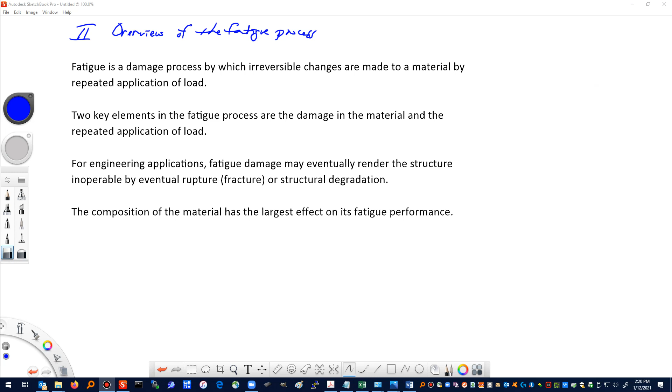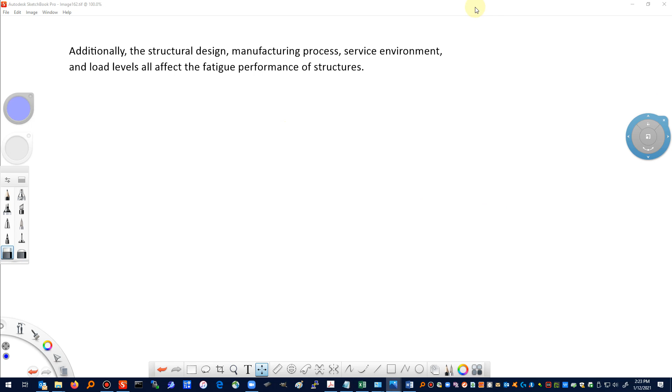Now, of course, the material composition isn't the only thing that affects the fatigue life. How that structure is designed, whether or not it has stress concentrations in it, for example, the manufacturing process, stamping or machining, that sort of thing, the service environment, and the load levels, of course, all affect the fatigue performance of the structures. So we're going to take a look at a lot of these different aspects, and we'll learn how to incorporate this into the kind of fatigue data that we might get in a laboratory environment.

All right, so what goes on in this fatigue process? Let's spend a few minutes to talk about the fatigue damage process and some of our familiar assumptions that we might have in engineering and engineering design. So probably one of the most common engineering analysis simplifications that we can make is that materials and systems act in a linear manner. So in other words, Hooke's law. Of course, Hooke's law, we would write this as F = Kx.

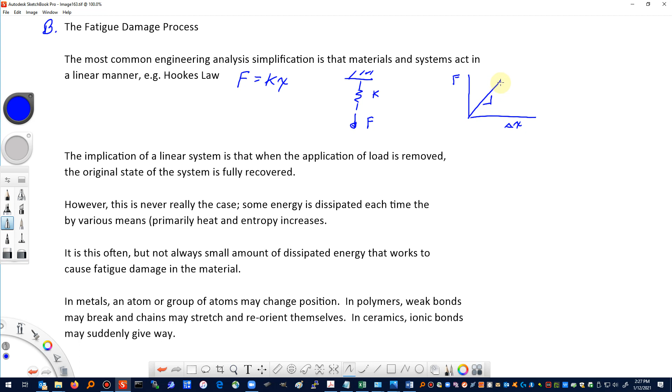And that comes about through a spring being loaded and observing what happens to that spring. If we put a load on this and we have certain spring stiffness, then the load and the deflection of that spring, if it's a linear spring, are linearly related. As we increase the force, we have an increase in deformation. As we remove the force, we have a decrease in deformation until we get back to its equilibrium position.

In other words, when we have this linear system, when the application of load is removed, the original state of the system is fully recovered. That's the assumption with linear elastic behavior. I know many of you have done linear elastic finite element analyses. You're assuming that this thing, whatever object structure you're looking at, behaves like a giant spring.

When you get down to it though, if you have a real material that you load and you unload multiple times, the original state of the system isn't really always fully recovered. Some energy is going to be dissipated each time, usually by heat, and the entropy will increase.

Usually this amount of heat that's generated is pretty small, but it doesn't have to be, and this heat can work in different ways. This dissipated energy is from things that change in the material that don't go back to their original positions. In metals in particular, you might have an atom that moves into a vacancy, or a group of atoms may slide like a slip system or a slip plane.

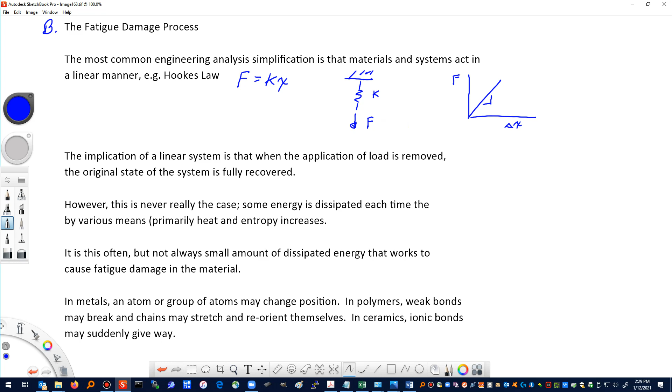So these things that go on, the slip systems and whatnot, these small changes can accumulate to cause internal redistributions of stress and strain in the material. And then small cracks can form that lead to eventual structural failure. So there are a lot of different points of view we can take to study fatigue. We can look at microstructure, be very focused on that aspect. We can take a look at very small defects like small cracks and so forth. We take the point of view of structural design or manufacturing and so forth.

And while all of these are good points of view to study fatigue from, for our class, which is a class in fatigue analysis, we're going to study the engineering methods for computing the useful life of engineering structures. All of these things are important. The microstructure and the material properties are very important, and we will need some way to quantify the material properties and be able to use them effectively.

But in our class, we're not going to be very concerned about the specifics of the slip planes and dislocation development and so forth. We're going to leave that to the metallurgists, and from their perspective of teaching the class, they will have that aspect. Someone that is going to make a career in fatigue and durability analysis should have all aspects of fatigue learned and covered. For our class, again, we're going to look at the analysis of structures to calculate fatigue life.

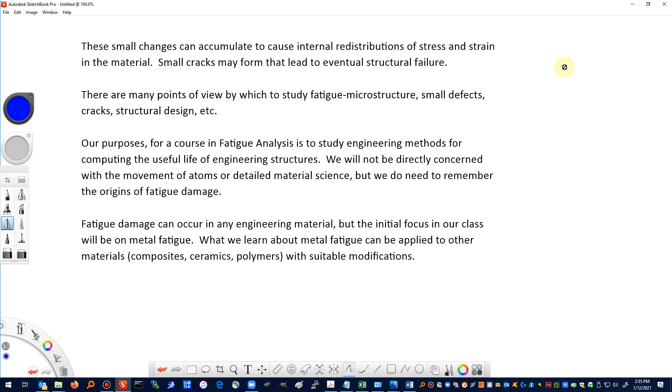So there's many places that we can start when we talk about fatigue analysis, but I think personally a good place to start is taking a look at time histories of load. We said that we had to have a repeated application or alternating load applied to our component in order to have this fatigue process. So let's classify or explain some different things when we take a look at time histories of load. And our initial discussion is going to be motivated by how things have historically been looked at for fatigue analysis. Certainly fatigue has been around for a long time, but the systematic analysis of fatigue was really started by a man named August Wöhler, who studied failure of train axles.

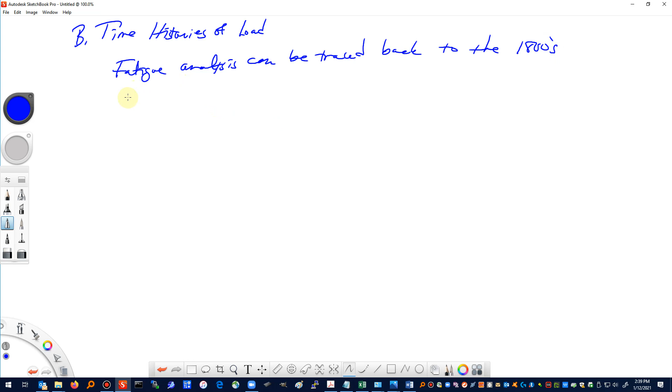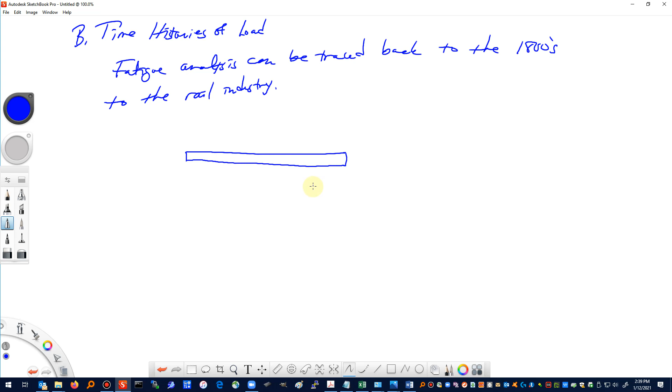All right, so in the 1800s, transportation of materials and goods by rail was becoming very common. And if you're familiar with the way train axles are, I'm going to draw kind of a poor sketch, but it'll work for our purposes. We can think of a train axle, which is really a big circular steel bar. We have a couple of wheels attached to it. Okay, and this of course would be the thing that sits on the track.

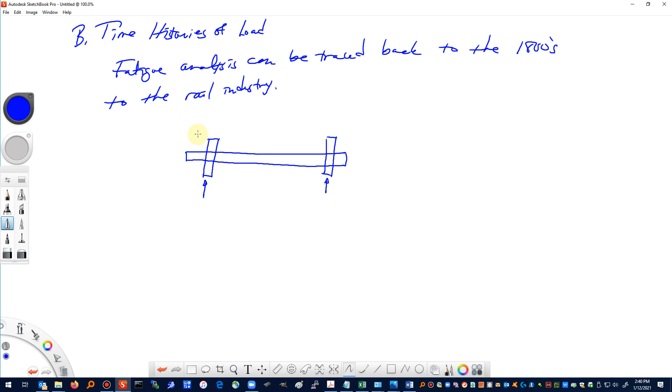The reaction from the track is up this way. And then train axles usually are used in sets, and they're attached to each other by the side frame, which transmits the load from the car to the axle. Now the side frames actually sit on the outside of the wheel, at least in modern trains that I'm familiar with. So that presents a downward load this way. And maybe I can use a different color. If we track what happens to a point on the outside surface of this round bar, okay, so we have a circular cross section.

If this were a problem in static loading, we would be familiar with our formula that sigma is equal to My over I. We would plot the shear force and bending moment diagram for this beam-like structure. The shear force diagram would go down, it would go over and up, it would have zero shear in between, it would go up, over, and down. So this would be what the shear diagram would look like.

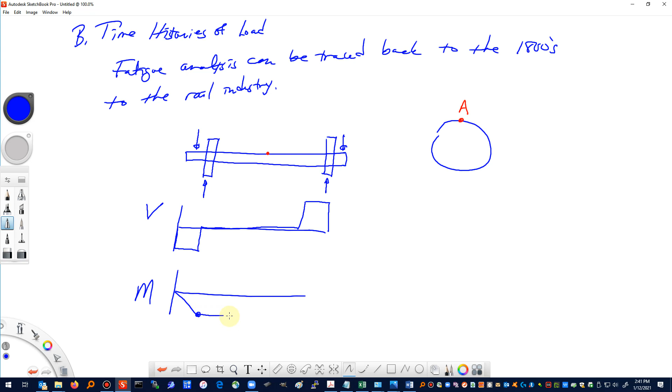The moment diagram for this structure would do something like this. It would slope down, it would hold constant in this zero shear region where it's not changing, and then it would slope back up. So these would be the key points here. And in between the wheels, then, we have a constant bending moment.

So if we think of this as an elastic loading situation, we've identified the centroid of that. The distance from our centroid to where that point A is at, we call that distance y. Y, not y bar. And that point on top would be in compression, so we would say that the stress at that point would be equal to minus M times y over I, I being the moment of inertia of the section.

If the load is constant and the cross-section stays constant, the stress changes with this position y. Let's take a look at that in a little bit more detail. Okay, so I've drawn a sketch with a little nicer circle there. As the shaft rotates through some angle theta, the height y will change. Of course, when theta is down here at 0 degrees, then y is equal to 0. When theta is up at the top at 90 degrees, then y is equal to the radius of the bar. But in general, we would say that the height y would be equal to r sine theta.

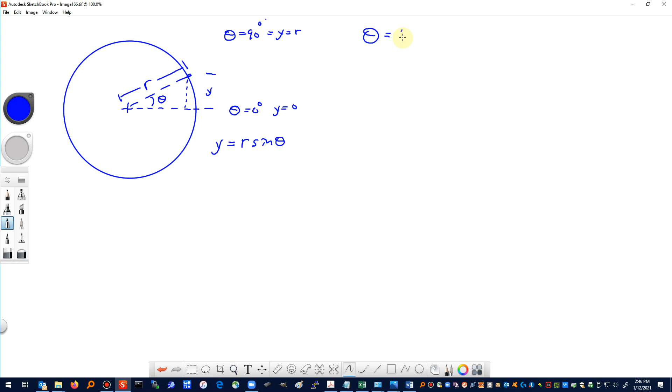Okay, so there's a little bit more room there. Now, if the shaft is rotating at a constant angular velocity, then our stress would be proportional to, of course, M over I times this height, the y distance. We would say that, given all the other things being constant, the stress would be proportional to sine omega t. And as it goes up to the top, we would get one value of stress, say negative, and as it goes down to the bottom, we would get another value of stress, say positive, depending on how the bending loads were acting.

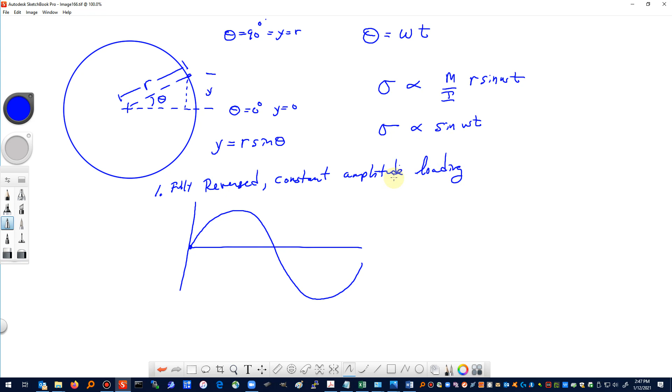And so if we were to plot this out, starting with theta equal to 0, we would have a sine function. And this particular type of time history is called a fully reversed constant amplitude load. We'd have one cycle of load that goes from here to here. We would have a maximum stress and a minimum stress that would be defined in these ways.

So as we do fatigue testing today, even though we don't often use rotating bending, at least in my lab, I often still use fully reversed constant amplitude sine wave type loading that's digitally controlled by the controller on the testing machine. Now, in addition to that, we could have constant amplitude loading that's not fully reversed. And so in those situations, we would have some cycle that was offset from the zero load. Okay, so this would be stress on this axis and time on this axis. And so we could have a waveform that was up here.

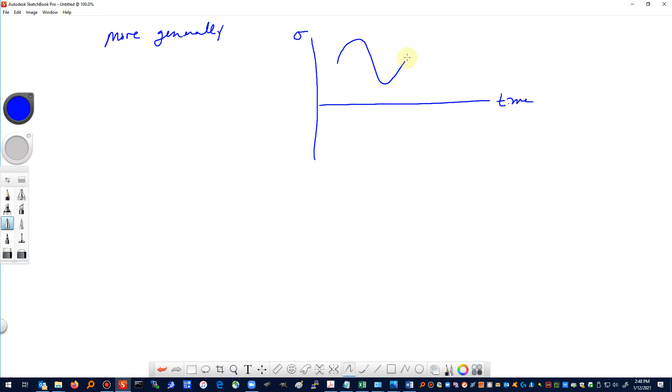Now there are some important terms that we're going to be using a lot in the class. We've already talked about a cycle. It's a complete up and down of this. So from here to here would be one cycle, from this point back to this point again would be a second cycle. We can talk about the amplitude of the cycle.

And we can talk about the stress range of the cycle. The stress range would be from the peak to the trough. Okay, and that would depend on the maximum and minimum stress. So again, we could have the maximum of the cycle and the minimum of the cycle. And the stress range, delta sigma, would be the difference between those two. We can also see that the stress amplitude would be half of the range. And then this place where these stresses cycle about is called the mean stress.

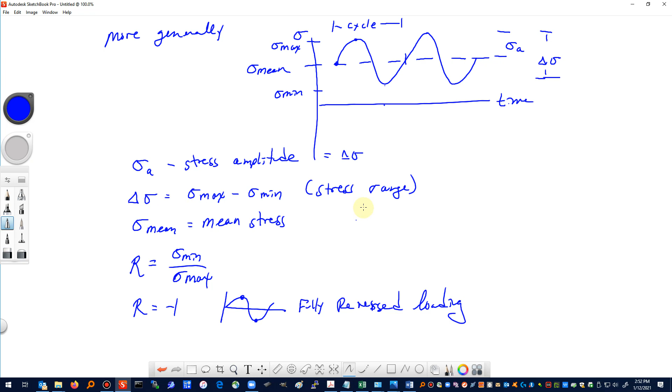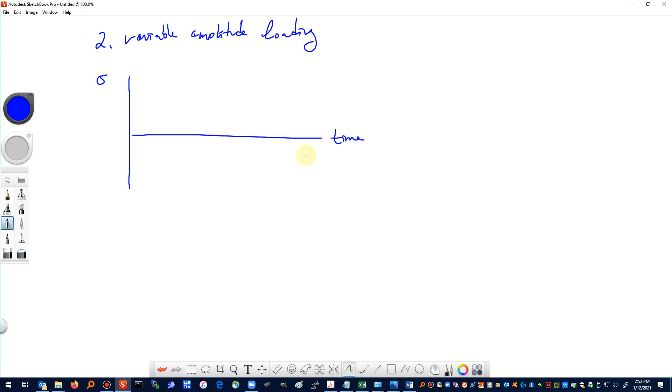Now there's another type of loading that I'm going to show you and that you're going to work with in our class, and that's going to be called variable amplitude loading. So again, if we have stress on this vertical axis and time along this axis, variable amplitude loading just kind of goes all over the place.

Okay, how might you get this type of loading in a component? Well, if you're in an aircraft and the wind is gusty on the wings and the wings kind of move up and down a little bit more when the wind is changing, then you may have some peaks, and you may have a whole bunch of little small things as things are just kind of vibrating along at small amplitudes.

So this variable amplitude loading is common in any kind of transportation system like cars and aircraft, and even to some extent in the railroad industry, although that tends to be much more constant amplitude loading on the axles. You could have some situations where you have more variable loading if you look at the overall system as it stops and starts and so forth.

Now, a lot of the things we talked about in the previous slide with the mean and all that doesn't necessarily look like it makes a lot of sense right now, because we have all these small cycles and big cycles. So in a way, what I've drawn here can almost look like the situation where I have repeated large cycles, kind of an overall sine wave, but superimposed on that is a whole bunch of smaller amplitude, higher frequency cycles on top of it.